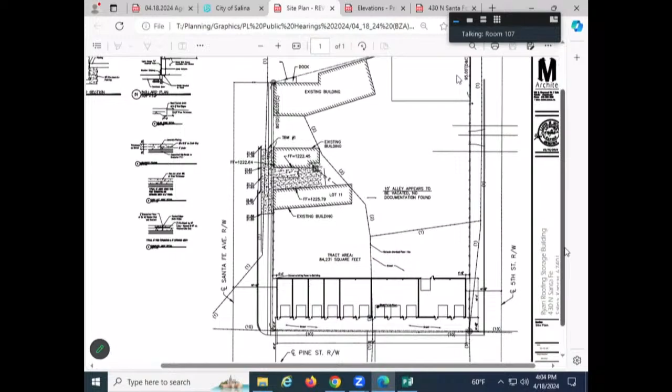Now you'll notice the building is almost as wide as the lot. The lot is 250 feet wide. The building's 240 feet wide.

That's possible because there is an interpretation that because we have a prevailing setback of 0 feet on both 5th Street and on Santa Fe, that all new construction can match that prevailing setback, meaning there is not a required front yard setback on Santa Fe or on Fifth Street, but there is no prevailing setback along Pine, and therefore the 25-foot setback still applies to Pine Street, but not Santa Fe or Fifth Street.

And so the applicant is requesting this variance to reduce the front yard setback on Pine from 25 feet down to 15 feet. As justification for that requested variance, they note that their property has street frontages on all three sides, and by having a 25-foot setback on all three sides, it would decrease the usable area.

They also note that by aligning the property, or the south edge of the proposed building, with a 15-foot setback, it would align with the property directly to the west.

So in 1990, there was a variance request for a 15-foot setback for a mini storage building that was constructed directly across the street to the west. That building has a 15-foot setback, and the applicant would like to match that 15-foot setback.

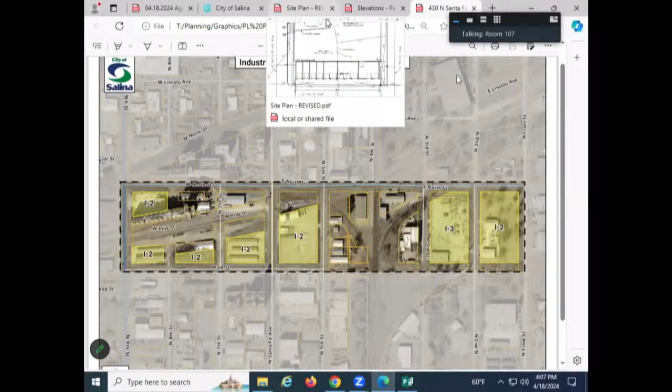The applicant also would like to note that the property to the west has a 15-foot setback, and they would like to match that. So in staff's mind, the 3 front yards is not unique, and the 15-foot setback of the property to the west is not sufficient justification for matching the property.

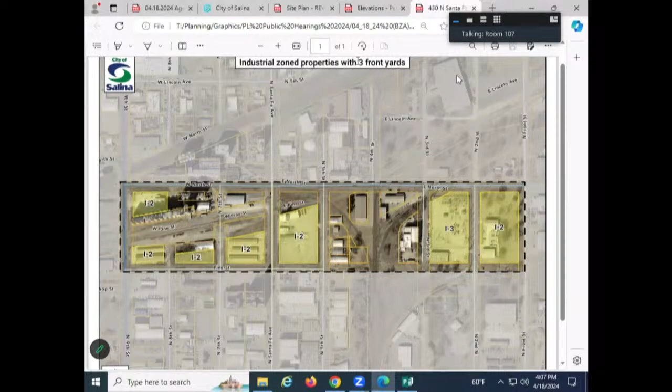If you were to look at the adjacent property in relationship to the subject property, you'll note that the size of the subject property is about twice that of the property to the west, so they're not really comparing apples to apples.

What staff has done here is we've imposed the footprint of the neighboring property to the west on the subject property, and you'll note that the footprint of the neighboring property is about the same size as the open undeveloped area that the applicant has on their property. So staff doesn't feel like the site is unique in having 3 front yards.

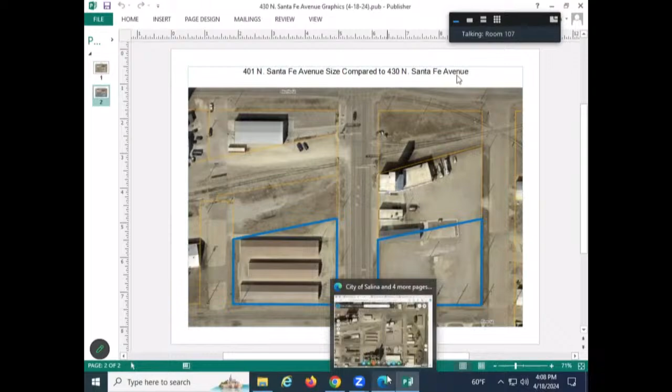There isn't good justification or reason for needing to line up with the south building to the west, because there's plenty of room to have a 25-foot setback and still construct the building that's being proposed. So staff would ask for additional information as to what is unique about this property that would warrant the variance request.

Looking at the effects on the neighbors, the applicant states that granting the variance would not affect the neighboring properties because there's already a building to the west that has a 15-foot setback, and that their building would be aligned with theirs. They also note that Pine Street is a lightly traveled road, which is true, and only has about 700 vehicles a day, but that's still 700 vehicles a day.

There's also OCCK directly to the south, which has and operates the local busing system. So there are special kinds of traffic taking place that may not show up in the numbers, but there are buses and other things that travel and use Pine Street.

Staff's response: if you look at the site plan, there are a number of overhead doors facing Pine Street. So one of the questions that staff has had is how will those doors be accessed from Pine Street? Because what we don't want is vehicles just pulling in directly off of Pine Street onto the property and accessing the overhead doors.

Having a good, clear plan of how those doors would be accessed is going to be important. The applicant said that even though the plan doesn't show it, they would be using two 30-foot wide openings onto Pine Street. Staff still has questions of how that would work.

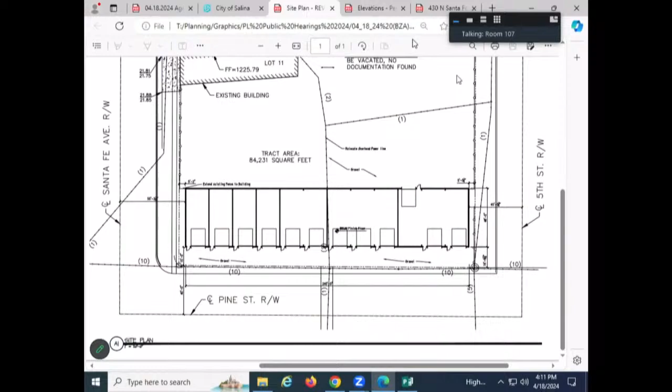OCCK has contacted the City of Salina with concerns about plans in which vehicles would back into Pine Street, making it an unsafe situation. They are concerned there may be an accident with one of their buses, or with employees or people who use their services, because their headquarters is directly south of this property on the south side of Pine.

Looking at unnecessary hardship, the applicant must show that not granting the variance will cause an unnecessary hardship by denying reasonable or beneficial use of the property. This requires more than just showing personal inconvenience or increased costs.

The applicant's architect states that not approving the setback would create a hardship because it would reduce the usable area of the site, and would also reduce storage and the potential for future buildings. Staff understands that it would be convenient for the applicant to push their building as far south as possible to reserve more open space on the site.

However, we would reiterate that there is 146 feet from the south edge of the building to the south property line, and the open space available is nearly the same size as the entire lot directly to the west. So staff doesn't see any reason or hardship that would be placed upon the applicant if the building were moved up to have a full 25-foot setback from Pine Street.

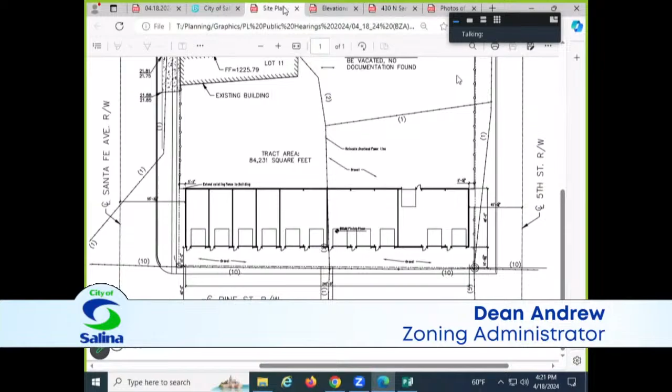Hey, thank you, staff. Are there any questions for staff at this time? I have a question. Okay. Looking at the aerial photos, it appears that there's power lines that run along Pine Street. Are there any utility easements that need to be taken into consideration?

Well, there is a utility easement that runs north-south on the property that would go underneath the building, and staff has been working with the applicant's architect to contact the utility companies and have that easement vacated.

The feedback we have is there aren't any utilities in that easement currently, so vacating it shouldn't be an issue, and I believe it's going before the City Commission on Monday. The power poles you referred to are in the right-of-way for Pine Street, not on the property, so they're within the right-of-way.

Another thing we probably didn't touch on enough is if you look at the property to the south, Pine Street used to have 80 feet of right-of-way. In 2021, the City Commission gave final approval to vacating the south 20 feet of that right-of-way.

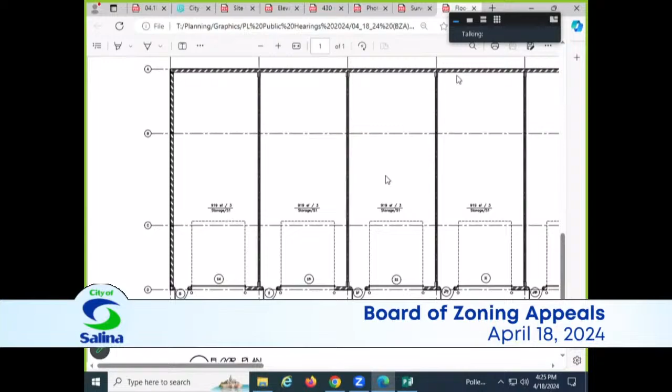We might ask the applicant that. Okay, I can defer to the applicant on that. Then my follow-up question is, on Pine Street, where those bays are originally proposed to face, what type of parking restrictions are on that street?

On Pine Street, we don't have any parking restrictions along the street per se. One of the challenging pieces is that there is curb and gutter now on the south side, but not on the north. Historically it's been a gravel road, chip sealed in 2017 for the first time, as Mr. Andrew said, so it's fairly new in street terms of having a solid surface.

So there is a solid surface, but we don't have an urban standard of curb and gutter on the north side, and it's always kind of tricky knowing when you're actually at the edge and when you're not. I don't know that I've really seen anybody parking up there. One thing that could be done is improving the street with curb and gutter, which would make the edge more delineated, but I don't think there's any limitation on whether or not you could park along the street there.

The reason I was asking that series of questions is when I think of storage units, I think of vehicles with trailers. I have a 22-foot trailer, and there's no way in 25 feet that I wouldn't be extended out and impeding traffic if I was to egress to the south. That's why I was asking that question.

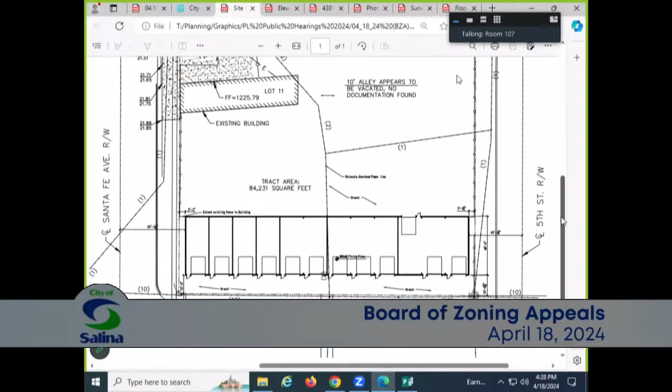Being an I-2 zone, it's not required to have any hard surfaces, so that's part of the reason we're doing this, and we're not really looking at paving anything on the site, because since it's an I-2, it's not required.

We're looking at the future, down the road, with additional buildings, kind of like the neighbors. They moved the thing over to pick up the 10 feet so they could put their 3 buildings on it. That's kind of the same way into the future - what we're looking at doing here is additional buildings onto this site for storage for Ryan Roofing themselves, and for mini storage, I guess you could say.

Basically, our product - we have a lot of product at different times of the year, for insulation and roofing material and equipment - that was our main concern with the building. But with that size of building, we wouldn't at all times need that much space.

So basically, it'd be renting out those bays that are roughly 48 by 20 feet. They're 20-foot bays - I know there was a question asked about that. So they're all 20-foot bays.

Basically, we've divided it right now into a larger 3-bay on the end, and another 3-bay. Those could be divided down into single 20-foot bays, but right now for Ryan Roofing, for what they need for storage areas, we've left a couple with access off the yard, so they wouldn't be coming off of Pine Street to access that piece.

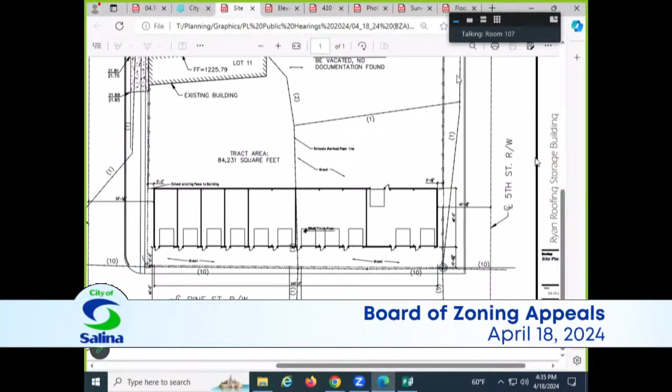And if you had a truck or more than one truck there at the same time, say you have a truck here and another truck pulls in beside them, how are they backing into Pine Street without just backing out blindly? Because they've got a truck right next to them, they won't be able to see until they're already in Pine Street.

Yeah, I mean even with another setup, if we did go with the 25 foot, you're still in the same situation. You're backing out, you still can't see. I'm not going to disagree with you, but yeah.

The only other thing we might consider is flipping the doors to the yard side. If we could get the 15-foot setback, put the doors to the north side, we would access from 5th Street into the property. We'd have to look at getting another easement or approach for 5th Street on that half of the yard. We do have one on the north side there that comes through the yard.

That would allow us to possibly do our additional buildings on the site, and we'd be matching the property across the road, but we wouldn't have access there—it would be a buffer between the road, the public right-of-way, and the building. It would allow us a little extra room in the yard to get in and turn around, or with the additional buildings we're planning for the site, still have room to get trucks turned in and backed in. So that's something we'd be willing to look at.

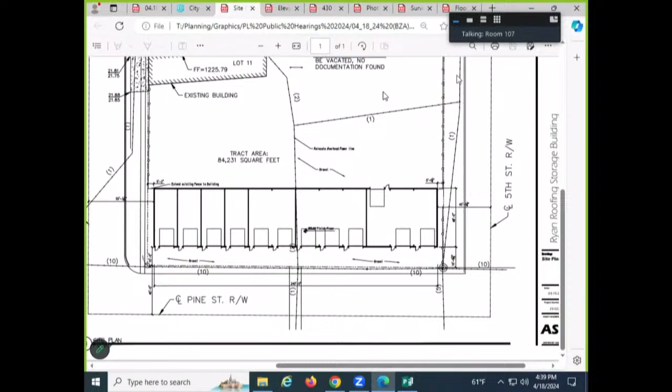Yes, they'd all open together. That way, from a security standpoint, if we had another building that came off of the existing building to the left and across, that isolates that side into a storage area. We've got an access—we know we're going to have people coming in, could be 24/7, and they're not really coming into Ryan's lot, for security purposes of his materials and equipment.

So if you had a building on the north side, it would make more sense to flip it around to keep all the access together. Going together, yeah.

And there's no existing curb cut to accommodate that, is that correct? Not on 5th Street currently, no. There's an entrance there to the north—yeah, right there. We've got an entrance off of Santa Fe that comes straight through and then onto 5th Street.

You see the curb cut right there. But we would be looking for another curb cut down, probably in the center of that space—yeah, right in there.

Because with this building, if we did that, then we would have to come in and do some fencing from the existing building across, to separate that south piece, just for security purposes for Ryan Roofing, for their equipment and stuff. So if you had two buildings there, the southern half of the property would virtually be taken up by storage.

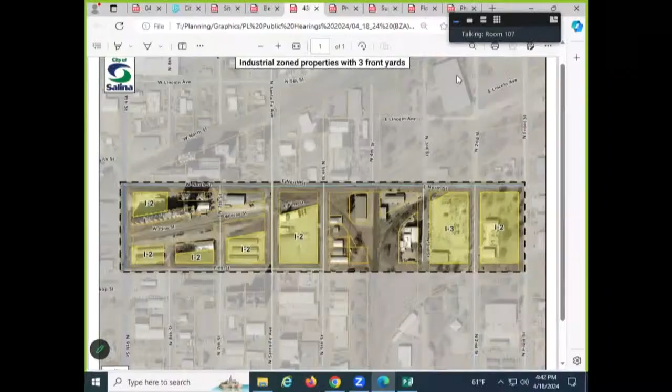But if we only had a 15-foot setback, we'd be matching the neighbor across the street. That keeps everything aligned down Pine Street and Santa Fe and Fifth. But then that extra 10 feet for us, for maneuverability in the lot, is huge, especially when you're bringing in semis, trucks, trailers, and large lifting equipment to move material around.

For the north side of the building—I mean for the north side of the property. Well, for the north side of the property, but we would be bringing trucks and stuff into that south part to unload into the buildings.

And the two existing buildings at the north part of that property, they would remain? Yes. The farthest north one is his office and warehouse currently. The small white one in the center is leased out to the railroad, and the other, the gray building, is a smaller storage building currently.

My only comment would be it'd make your life a lot simpler with that 10 feet, not to worry about it. Yeah, I mean, if it comes down to it, if you guys don't approve the variance, then we will end up at 25 feet. Whether we have the doors to the north or south, I don't know—we'll have to discuss that.

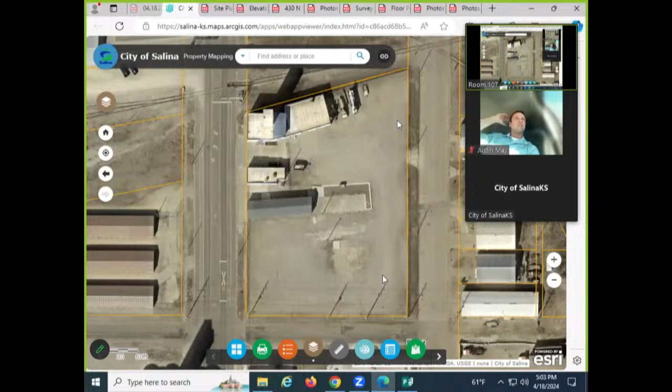I guess the other thing we'd point out is that you could, not with a large vehicle, but there would still be 5 feet from the west edge of the building and 5 feet on the east side where persons or small equipment could go around the side of the building to access the south side if need be, or they could put a gate in their fence to access it that way. But that would be the limits of the access from the south.

Are you ready? Mr. Chair, I move we deny application number V24-3. All right, we have a motion to deny the application. Is there a second? Motion fails for lack of a second. Do we have another motion?

I'm sensing, given that the last motion failed, that there's some inclination from the board to try to find a way to assist the applicant with the variance request. So with the help of city staff, I would like to word my motion in that I move that we, as a board, approve the variance of 15 feet on the conditions that no doors face south, all doors face north. And is there anything else that staff would need in that motion?